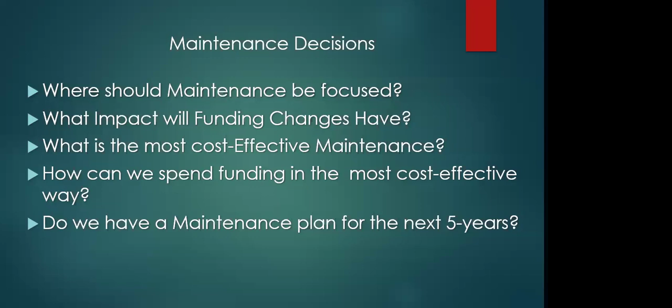It's pretty much going to be essential if you really want to try to develop some means of evaluating what you're responsible for. You need to assess the conditions of those assets, weigh the alternatives, and establish a long-term program based on your budgets, so essentially you can achieve those goals.

The pavement costs: for the most part, pavements and most particularly local roads have just basically evolved over years. A lot of them may have started out as horse trails or wagon trails, widened to deal with the automobiles, further widened to deal with the local roads now, given standards, but they haven't really been designed from the base up.

So part of the problem is these roads have just evolved, so it's difficult in some cases to get 30 years or 20 years or 15 years out of a roadway when its subbase is not really anticipated on having the loads that we have on them today.

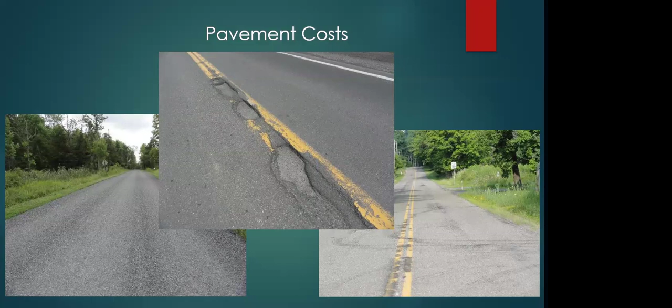With price increases and funding decreases, the maintenance budget gets worse and worse. It's not better. So it's a lot more difficult to deal with the assets that we have. So again, having an understanding of what's going on is going to be a lot more beneficial, looking at the whole picture.

This is an example of pavement condition over a period of time. You notice that if it's a properly built road, 75% of the time you're going to have a decrease in that condition of about 40%. It's going to go from very good to between good and fair.

But once you reach that point of good and fair, you start to get cracks in there. The moisture starts to get in there. Loads start working the pavement because the moisture's in there. The subbase starts moving. That pavement starts to shatter. That next 17%, you're going to lose another 40% of the life and the value of that pavement.

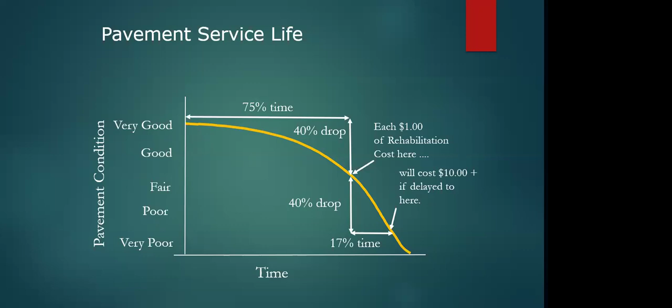So again, the idea is if you can maintain that road and keep it in good shape, you're going to get a lot more life and benefit out of it, as far as a bang for your buck.

As an example here, we've got a pavement section built about 12 years ago. It's in need of a surface treatment right now, whether it's a slurry seal or a chip seal or whatever it might be, something to seal that surface. That's going to be an estimated $20,000. And nothing's cheap. It's going to vary from year to year, location to location.

If that action is deferred for 4 years, allowing time for that pavement to become structurally damaged, again, the cracks start to show up, and it's going to require something a little bit stronger. If you've still got a solid base, you can do a thick overlay. But now the cost is upwards of $60,000 to $80,000, and those numbers are constantly rising with the cost of asphalt.

Again, if you put it off again, you wait too long, that cost is going to skyrocket to 150 to 200,000. So the idea is basically if we can maintain those roads while they're in good shape, it's going to be a lot more cost effective.

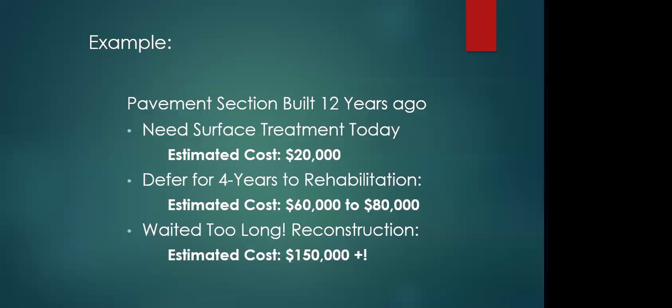And that's what we need to be looking at, the funding that's available. So again, this is kind of what we're focusing on. This is for pavement, but it goes for all assets that we own. The old saying: you can pay me now or pay me later.

Asset management can be a case of penny wise and pound foolish. It doesn't make sense to save pennies now by putting off the maintenance. Those deferred repairs are going to cost you dollars later on. So a comparison would be deferred maintenance is like debt with very high interest. The debt eventually is going to have to be paid, but the longer you wait, the more you're going to end up paying for the whole thing.

So the basic concept for road management, particularly, is setting yourself a baseline where you want to keep those roads in that certain condition. Again, you want to avoid getting into the poor aspect of it, but if you can keep them in good, very good condition, you try to keep them out there, find your level of service. If you wait too long, again, that reconstruction is going to cost you a fortune.

That says $10+ per unit. Every year that 10+ gets larger and larger. But if you can actually maintain it on a regular basis, doing that preventive maintenance, it's going to be a lot less expensive, more cost effective, and the road's going to be good most of the time. So again, it's just a little bit different way of looking at it, but it's the basic concept behind asset management, and that goes for everything.

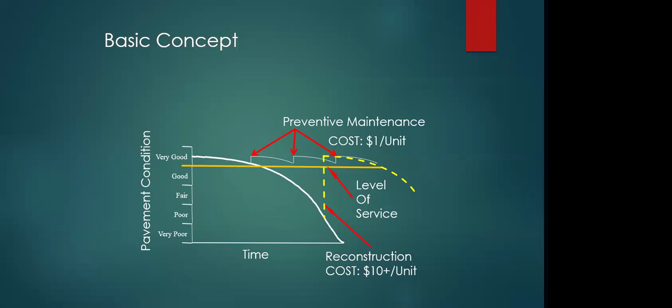Roads are obviously one of the more obvious ones and the larger ones we deal with, but it comes to our equipment as well. Again, the best approach when it comes to an asset management plan is just keep it simple. It's a simple process, but again, what you want to do is keep it easy to learn, easy to apply.

Most decision makers don't necessarily have formal training and all the high-tech software and all that stuff. But if you can keep the process easy, keep it easy to learn, it's going to be a lot easier to maintain. It should be systematic and provide a good organized approach to assure that all contributing factors are taken into account. Again, being organized is going to be helpful. It needs to be practical. Taking care of the roads and street systems is going to be an ongoing real life activity.

Taking care of road street systems needs to be workable. It needs to be realistic. You need to know where you're going. It needs to be practical about what you're doing. It needs to be understandable and acceptable. Again, the local board needs to understand what's going on, why you're constantly doing basic maintenance on a roadway or changing the oil in a vehicle. It just keeps those assets in good shape.

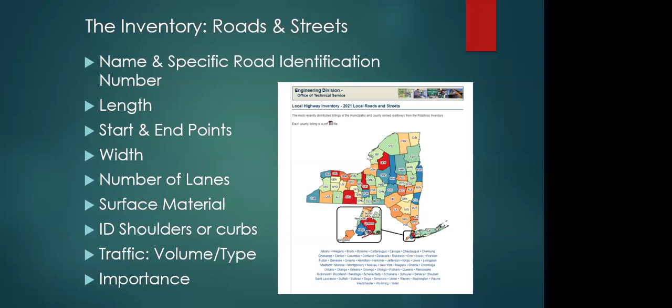It's kind of small here. But this is some of the information you get from the local roads listing. This is just a small example, but you can see you get the DOT identification number, you get the road name, you get the start of the section, end section. You can see they've broken it into multiple sections, 0 to 0.47 and 0.47 to 0.9, 0.9 to 1.5. It gives you an overall length, number of lanes. Again, gives you a lot of that basic information.

Most of the roads, if not all of them, for every agency should be in this manual. Otherwise, you're not necessarily reporting them to the state. But again, that information should be available. And that'll give you a good leg up on developing an inventory for you.

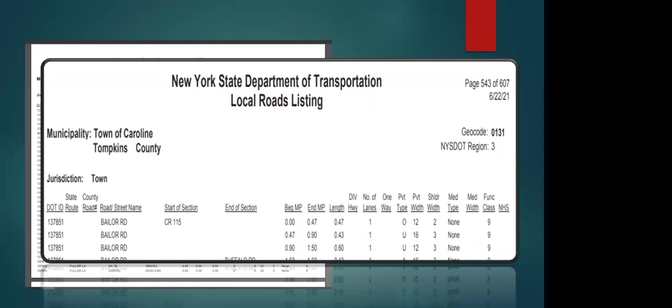Your condition assessment: again, inspecting your assets is the best way to know what the conditions of them are. Once you know where the specific asset stands with regards to condition, you can start making decisions on what needs to be done to maintain it and keep it in good shape. Again, those conditions are basically going to help you decide what the repairs need to be. And again, identify specific problems.

If you have a leaking oil pan, why is it leaking? You got a bad gasket, you have a hole in it. Was the oil filter not put on properly? Was it not tight enough? Again, you're going to be able to identify what the problems are, take a little closer look at it.

So again, looking at the different assets as well. The roads too. Do you have one section that's constantly creating potholes? Well, maybe you've got a spring or something underneath there. So again, looking at each one, identifying the problem helps identify what the proper repair is going to be. If you've got a spring under your road, covering it over isn't necessarily going to fix the problem. Maybe you need to get under there, put a pipe out, drain that spring, get the moisture away from the base of the road.

Again, assessment resources: if you're looking at pavement, there's a distress identification manual. This is actually put out by the Federal Highway Administration. They used to put out manuals like we have right here that you can see. They're all digital now. And again, the distress identification manual basically will give you what to look at in the various types of roads. You've got asphalt roads, brick roads, concrete roads, a variety of different types of roads that are out there.

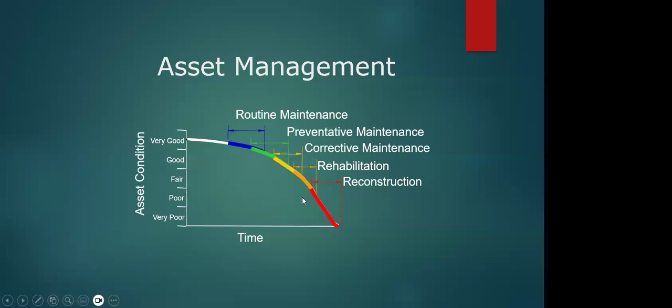Again, as we mentioned earlier, 70% of the time you're going to have roads in good shape. That last 30% of the time is when the roads are going to fail. Again, that's where the rehabilitation, reconstruction is going to be. It goes along with road quality and the cost too. If you can maintain them in good to fair shape, it's not going to be as expensive as it is if it gets down to the poor condition.

Again, the time is going to vary depending on the road itself, how it was constructed, how it was maintained, how its drainage is. There's going to be a lot of factors that impact the condition of a road, the life of a road. And the focus, again, the right treatment at the right time. Let the distress tell you what the needs are, not the politicians. They obviously want to do what's right, but if they're not aware of what's going on, the distresses will tell you what's going on. Is your pavement failing?

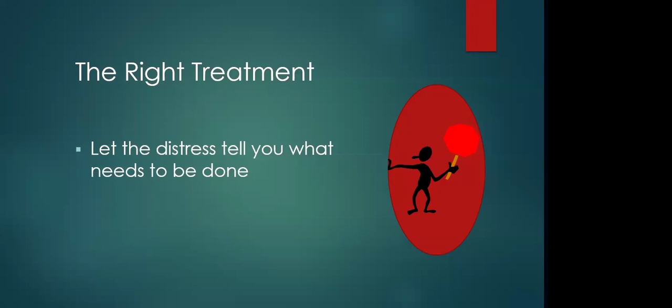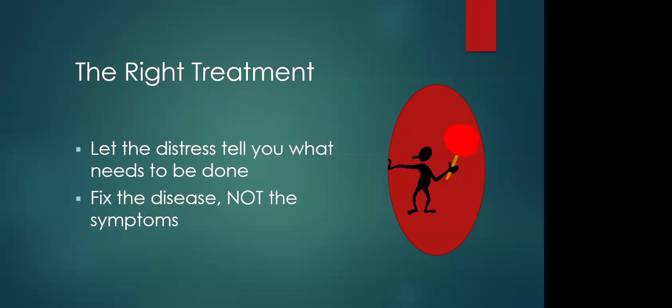Why is it failing? Do you have potholes, or do you have just an overall road failure? Maybe the traffic's increased over the period of time since it was designed. Maybe that's causing the pavement failure. Again, a lot of things to look at, not just the number. And you want to fix the disease, not the symptoms. And you want to make the best investment you can on those repairs to get the right repair. So again, it goes for all assets. You want to try to fix the problem, not go back and constantly fix them.

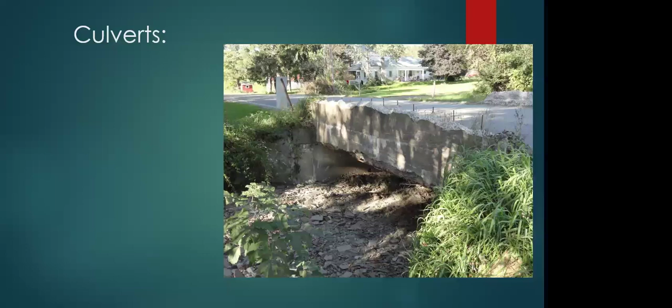Culverts are another asset that may be of high priority on the list. Again, taking a look at the different culverts that are out there, understanding what's there. Culverts cross under the roads. If they fail, that's going to reflect on your roadways themselves. As far as a culvert inventory, identifying which road it's on, giving each culvert an identification, maybe a location, whether it's GPS or stationing on the road. If there's a skew, an angle off perpendicular to the road, that's going to be important. The depth of cover is going to have an impact on how long it may last or how large of a pipe you might be able to get in there.

Maybe the number of pipes, length, width, height, the shape of the pipe, material, installation. That's going to be all the inventory. That's when you're going to look at each culvert from a book before you get out there. And if you can put together a diagram, that's going to help you understand what you're dealing with when you go out there and the culvert's failing. We have a culvert inspection form that's available as well. It goes through where it is, the date of inspection, the weather, the road number, the inventory culvert number, the stream name if there is one, shape of the pipe, material. Again, all that information is going to be critical.

And if you have an inventory of what culverts you have, you can have a pretty good idea how many culverts you have. It's not unusual for an agency not to know how many culverts they have. It's also not unusual to discover one that's already failed. Got problems with the road, don't really understand why. No, a culvert failed, you didn't know it was there. So again, having that information is going to be critical. Again, all these forms that have been shown here are available. Just let us know. We can get them to you.

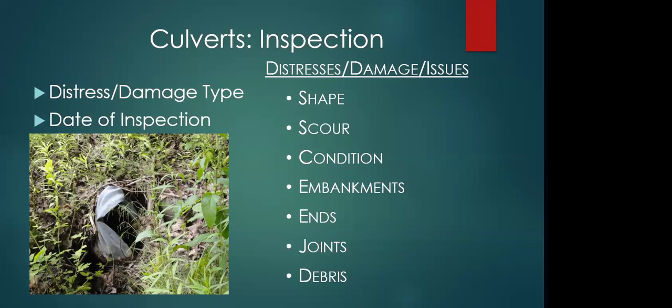Are the joints separating. Concrete pipes are known for separating. That can cause problems in your roadway. Is there debris in it? So again, just evaluating, doing an inspection on those culverts.

In a lot of cases, culverts now need to be considered for organism passage through them. So that's another factor as well. If you don't use that, that can easily be bypassed. So again, it's not the make or break.

Signs are another critical thing. And depending on the type of roads and traffic, you may be responsible for a variety of different types of signs. We've got a form for that again. Different types, goes through the location, direction, road name, closest intersection. A lot of the factors that you're going to need to know, just so you can go back if the sign's missing, go back and identify where it was, when it was looked at, and what you need to replace it with.

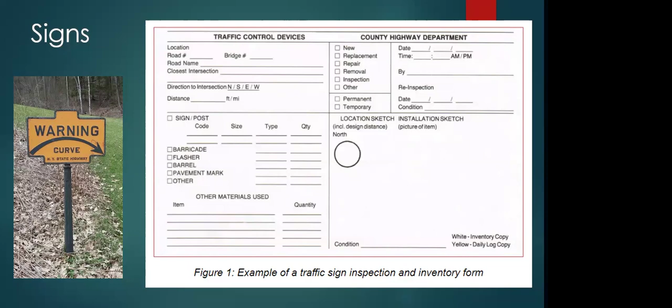So again, as far as the inventory, the road, municipal ID, the type of sign, MUTCD identification number, size, dimension, colors, the legend size. You can go into the plaque material, sign face material, GPS location, side of the road it was on, direction it's facing. Northern signs won't fade as quickly as southern signs just because of the sunlight. Installation date, that might be critical as well.

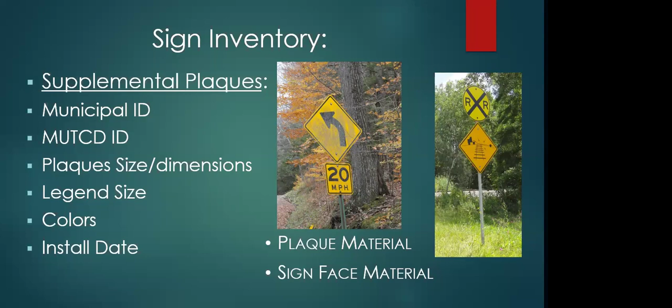And supplemental plaques are something else to take into consideration. Again, they're going to be critical as far as informing the public on what needs to be done, where it needs to be done, what's coming up. So again, takes those same aspects into it: the ID, the municipal MUTCD ID, the sizes, legend size, colors, installation dates. Signposts as well, they're going to be critical.

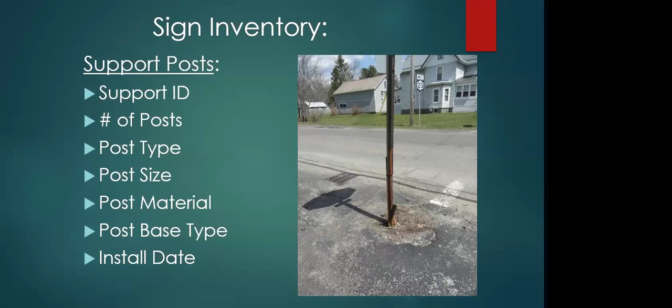In some cases, you're going to need breakaway hardware, again, for safety reasons. Again, identifying what type of support you have, number of posts, post types, post size, post material, post base type, installation date. It's going to give you all that information you're going to need to know long term. Again, that's just an inventory, just gathering that information. It's a lot of information when it comes to signs, because there's a lot of signs on every road out there.

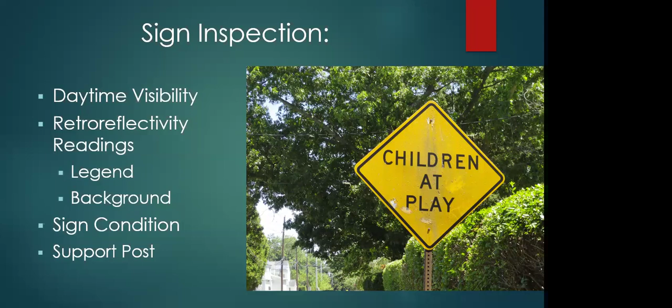Well, again, sign inspection, daytime visibility. If it's in good shape during the day, then maybe you don't have to do a nighttime inspection. But if it's not in good shape, you're going to want to go back and determine what the reflectivity readings are. Again, the legend, the writing, the background, the color, what the sign condition and what the post condition is going to be. These are all just observations out there at random, so to speak.

Again, if you've got a sign that's marginal, you're not sure if it's actually going to work, or you can't see it at night, there's several methods within the MUTCD for evaluations. Some are a little bit more complex and time consuming, but some are not. Different management methods are out there as well. If you know a life's going to last 10 years, replace them every 10 years. Do a blanket replacement: every sign facing south gets replaced every 6 years. Every sign facing north gets replaced every 10 years.

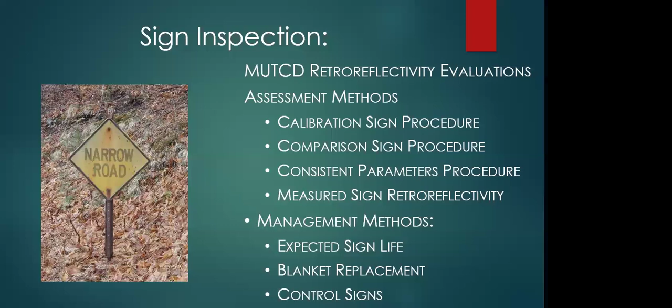Just a blanket replacement, or you can do a control sign, which is a little bit more intense. Requires you to set up signs every time you put a new sign up to see how they decay. It's going to take up a lot more landscape and time. But again, there's different methods out there, and the MUTCD has different ways you can do it. You want to keep safe. Signs are a liability, especially if the lawyers get involved, and you can understand why.

So again, this sign prioritization. The key signs that you're really interested in are the key warning signs and regulatory signs. Those are the ones that, if missed, can cause problems, mostly liability. Stop and yield signs, stop ahead, signal ahead signs, intersection warning signs, bicycle, pedestrian, school crossing, do not pass, do not enter, wrong way, keep right. Things that if people don't follow them, problems are going to happen.

Railroad crossing, turns and curves. Those are the most important ones to start off. Once you've got them done, you can follow up with other warning signs, other regulatory signs, other guide signs. These aren't as critical because they're not necessarily as life-threatening should somebody miss them.

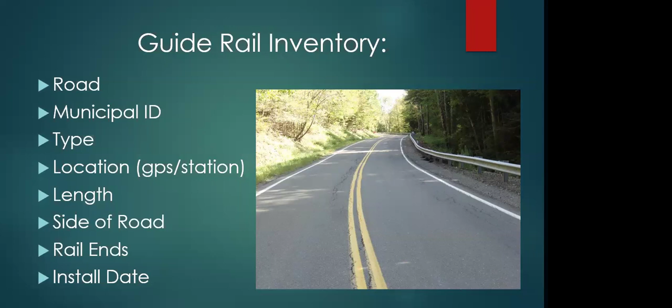And there's guide rail, again, where the road's on, given a municipal ID of that guide rail itself, type of guide rail it is, cable stay, W-beam, whatever it might be, where the location is, start and length maybe, the length of it, side of the road it's on, the rail ends, installation date.

Again, the rail condition, that's going to be pretty critical. You may have it up there, but if it's not in good condition, then it may not perform the way it's anticipated. Again, noting with the inspection, you're going to look at the rail condition, post conditions. Are they bent? Are they rusted? Do they have support? Is there vegetation on either side of them?

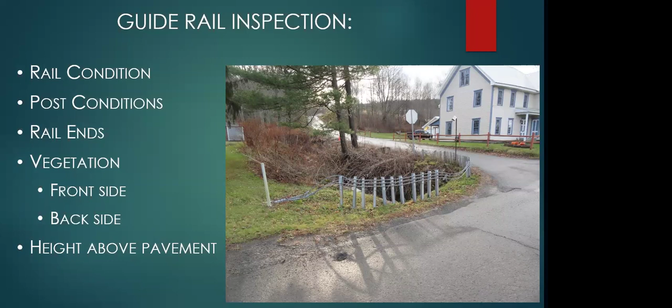What about the height above the pavement? Again, some of that pavement can get built up, decrease the effectiveness of that rail system, protecting it from getting towards whatever the danger is that they're in there for. Again, as I mentioned, are they properly bedded in the back? Again, doing regular inspections is pretty critical.

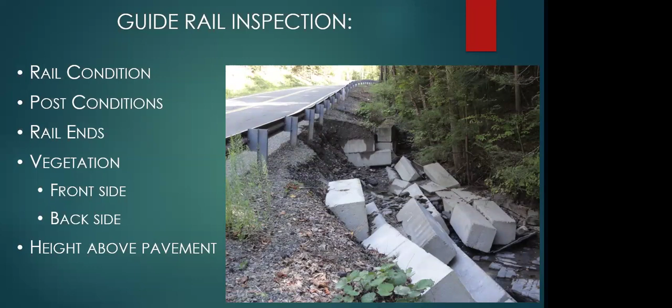And a lot of that stuff, if you need it and you're interested in having some of this, we can get it to you. And it's simple paperwork, but again, if you have all this information, not only is it going to help you plan for the future, but it may help you in the court of law as far as any kind of accidents or damages.

Again, fleet inspection forms. There's annual inspection, daily driver. I drove for UPS for a period of time. Every day we took the truck out, we had to walk around the truck and make sure that every light worked, every wiper worked, that nothing was broken. And if it was, we needed to document it, and then did the same thing on the way back.

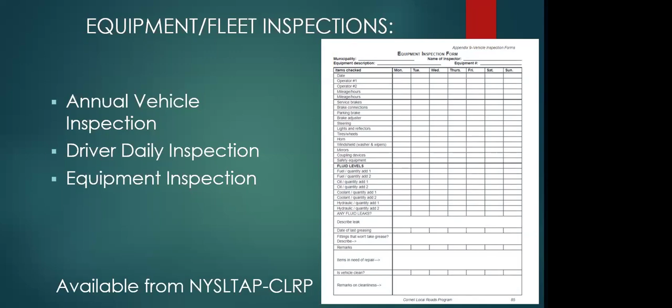And then daily driver logs, essentially. And when we brought those vehicles back in, they would make the repairs and fix them. So by morning, those trucks were safe again. Again, same with equipment. So we got a lot of different forms. Again, this is an equipment inspection form. And these are available. We've already put them together. You don't have to reinvent the wheel.

Well, again, it's a network process. It's a simple process. Again, develop an inventory, assess the conditions of each of those assets, develop maintenance and rehab alternatives, design repair alternatives, prioritize the maintenance, and generate reports and budgets. Basically, keep records is what that comes down to.

Again, if you can't document what you've done, you're kind of hanging there. Good intentions aren't really good in the court of law. So you want to protect yourself and have that documentation. Part of the implementation, again, is communicating with the board, the authority that basically approves the money. They need to understand why and where you're spending that money.

We've had a lot of cases with the CAMP program where the town boards realize, hey, we got to fix these roads, and what we're allowing them isn't going to work. So they've actually delegated more money toward the highway departments. So again, showing them sometimes helps educate the board.

Scheduling your work, again, focusing on what needs to be done, keeping good stuff good, and then scheduling that work and identifying the plan and sharing it. And then regular updating. Those maintenance and repairs go in, update that, so the next set of not so good equipment or road repairs or whatever it might be rise to the top. Updating that information, keeping it up to date.